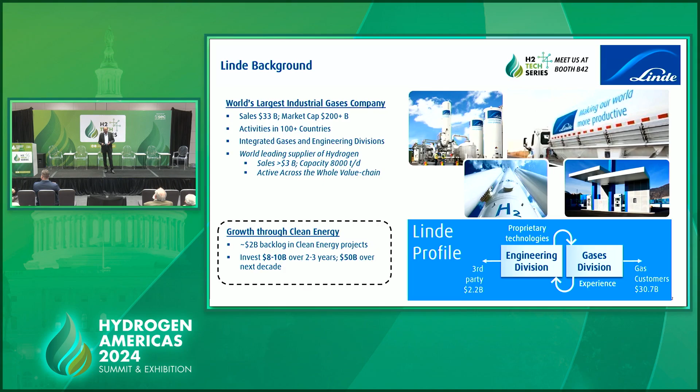So that's a little bit of background on the company. Now, just in terms of one of the main focuses when we talk about large-scale supply - we have heard a lot of talk today about electrolyzers and catering to individual needs. The way we think about it is networks. Networks are super important for large-scale industrial customers.

In order to enable large-scale supply to industrial customers, the viability of a single source, single customer model really is not economical and very difficult to realize. So this is just a mindset of how we think about it in terms of density, in terms of large-scale supply with multiple users and multiple feed points into a pipeline network.

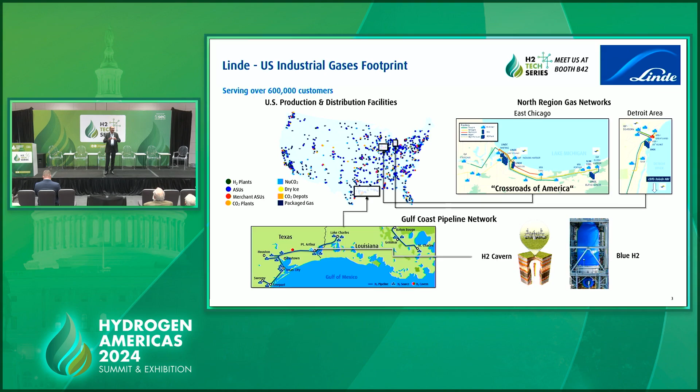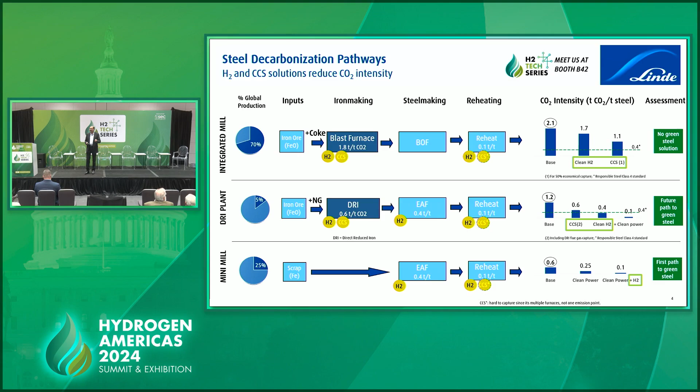So the main point I want to convey on this slide is that these steel mills require about a gigawatt scale, or 600 tons per day of hydrogen, for each steel mill. And that's what we are trying to discuss with customers - how do you get this?

From our perspective, steel makers can do many things to try to lower their carbon footprint. But from the Linde standpoint, we think of it in 4 things. The first is, of course, large-scale hydrogen supply, which is the focus of what I'm talking about here. We look at green hydrogen as well as blue hydrogen. And in the next couple slides, I'm going to focus more on blue hydrogen because that is available at scale and at cost compared to green, in our opinion.

Green hydrogen, from our standpoint, we are focusing on both. Linde, we are not necessarily married to one technology or the other, and the same with electrolyzers. For example, today we are working on about 400 megawatts of electrolyzer projects - not one project, multiple projects which total about 400 megawatts. So we have a lot of experience in actually building out new electrolysis projects.

But many of them are catering more to mobility and smaller applications. If you think about large-scale supply again, which is the focus of this discussion, we really think more about blue rather than green. So that's one thing, and I'll talk a little bit more about that.

The second thing, which is also very important for decarbonizing an industrial segment like steel or cement, is CO2 capture. CO2 capture is important not only for making blue hydrogen, but in addition CO2 capture can be applied directly to the steel mill or directly to the cement plant and decarbonize. And that actually can be more cost effective than hydrogen. So in terms of competition, you've got to think, can hydrogen compete with CCS? Can hydrogen compete with alternatives? That's one of the alternatives to consider.

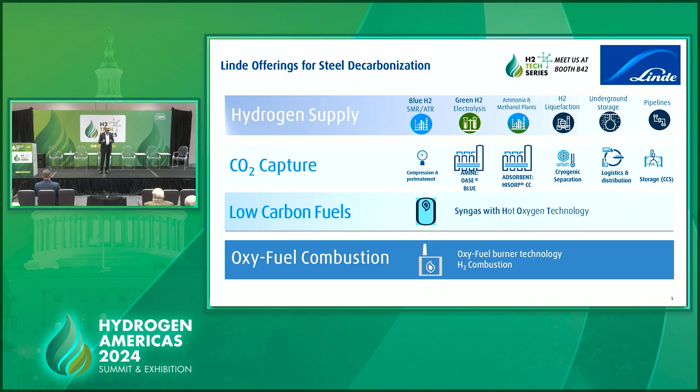This produces about 150 million cubic feet a day of hydrogen and would be very compatible with supplying a steel mill. So this is ready today, it's available at the large scale that the steel industry requires. And to get electrolyzers to this scale is still a challenge from what we are seeing. So that's one of the reasons why we are really focusing on blue hydrogen as a solution for large-scale supply. This particular plant is not serving a steel mill, it's serving actually a chemical plant.

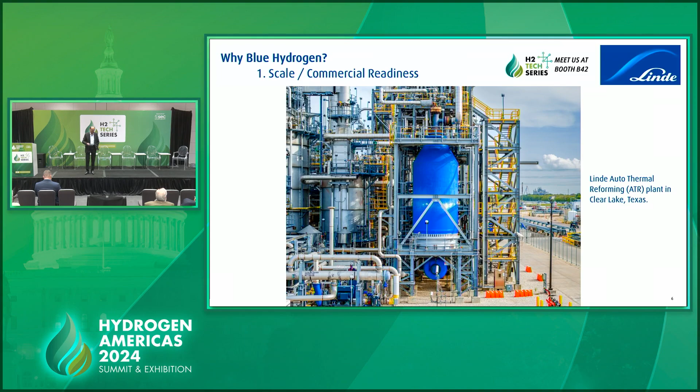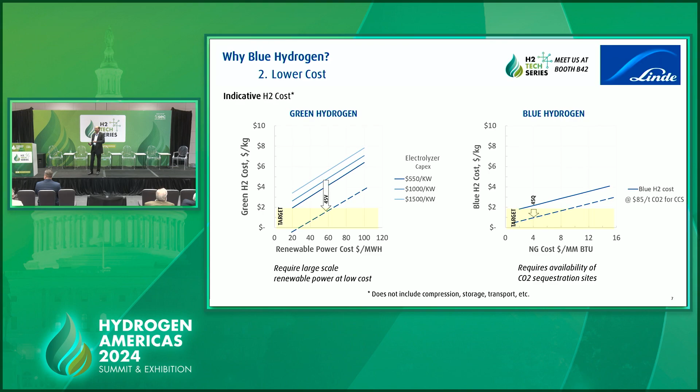Everybody is very focused on hydrogen costs. Don't take these numbers to the bank, but it's just to show you that the graph on the right is a lot lower than the graph on the left. The graph on the left is green hydrogen cost, which is primarily dependent on the cost of renewable power. You need to get really low in terms of cost of renewable power to compete, and typically a steel industry or most industrial customers are looking for hydrogen below $2 a kilogram, much below that. So the point I want to make is the graph on the right is a lot lower than the graph on the left, and that's why blue hydrogen generally tends to be much more favorable for industrial customers.

HISORP is an adsorbent-based technology where you can adsorb the CO2 coming off a flue gas or coming off a syngas, and then separate it that way. The advantage of this HISORP technology compared to the traditional amine wash is that it doesn't require any amine solutions, so no chemicals required, and also it just requires clean power. It doesn't require any steam generation, so there are no secondary emissions to take care of. So if you want to decarbonize a solution for CO2 capture, this HISORP adsorbent technology can be more appropriate. Of course, every case is different, and we have to look at the plus and minus in the situation, but the HISORP adsorbent-based systems can be pretty powerful for a steel mill type of system.

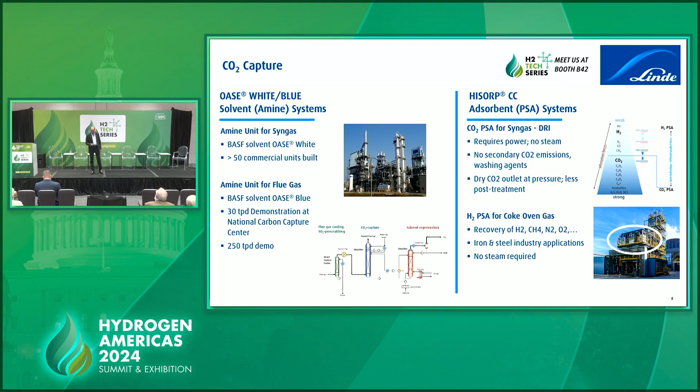This, for example, is a picture — because people are less familiar with this adsorbent-based system — of this HISORP technology, which we have been running for over a decade at a steel mill in India. We have done some others, but this particular picture is from an installation. So the point I'm trying to make is this HISORP adsorbent-based CO2 capture is also a very powerful approach to decarbonizing a large industrial segment.